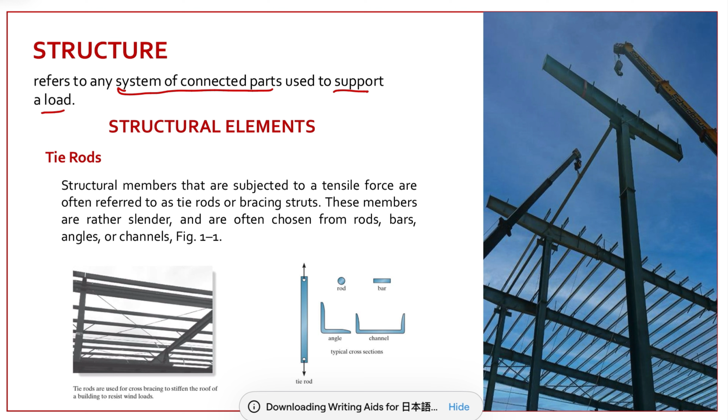We have different structural elements. First, we have the tie rods. Tie rods are subjected to a tensile force, and this is used to brace our roof or roof beams. So these are the tie rods.

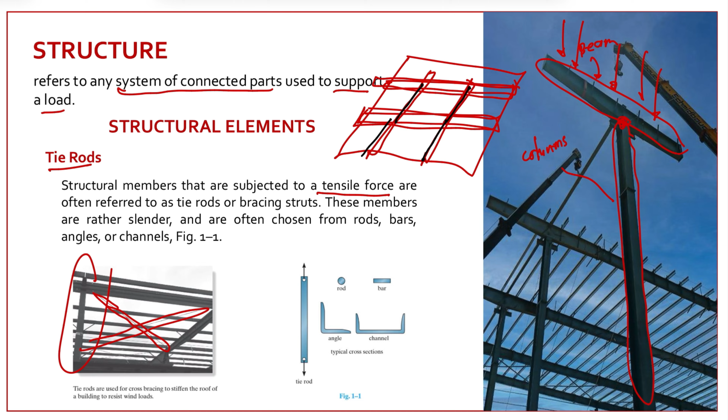Okay, so of course we have a beam. This is the straight horizontal member used to carry vertical loads. Usually our beam is made of concrete, so we have what's called concrete beams. But we're not limited to concrete - we also have wood, timber, and steel.

Concrete is usually used because it's easy to construct on site - we just pour the concrete. But different materials have different properties. For example, concrete has weak tensile force, meaning if we pull it on both sides, it easily fails. But when we compress our concrete, in compression, our concrete is strong.

That's why we also add reinforcement - adding reinforcement to concrete, what we call reinforced concrete, makes it stronger when it comes to tensile force in this type of load. Because steel has high tensile strength. So when the steel has high tensile strength and at the same time the concrete has strong compressive strength, it means its strength is balanced. So it can sustain both tension and compression - that's why we call them reinforcing rods.

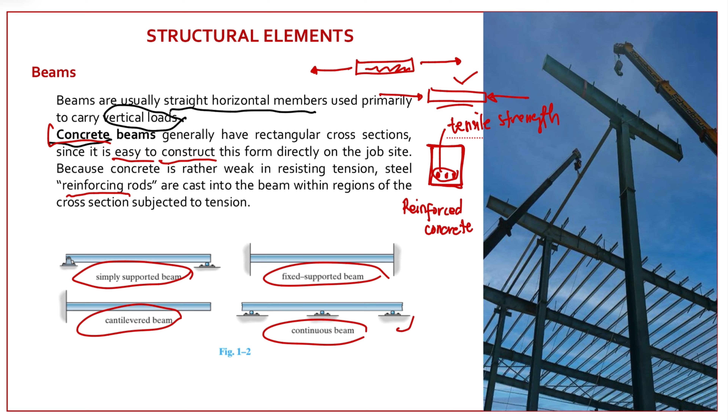So that's our beam. We have different types of beams: simply supported, fixed support, cantilever, and continuous. Usually we only analyze simply supported and cantilever beams. The continuous beam will come up around finals.

Aside from beams, we also have the columns. If beams are horizontal, our vertical members are columns. This resists axial compressive loads. When we say axial, it's perpendicular to the cross-section. We have different cross-sections for our columns.

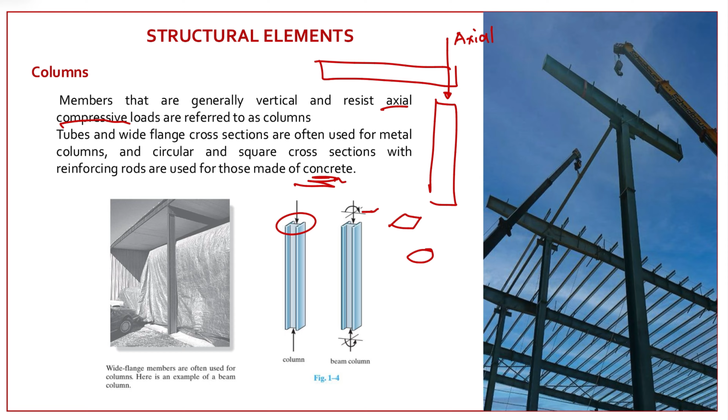Aside from those, we also have the trusses. A truss is a combination of vertical, horizontal, and diagonal elements. This consists of slender elements usually arranged as a series of triangular elements.

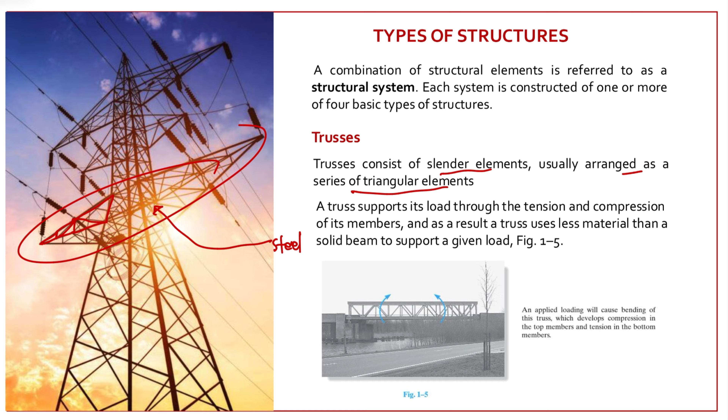We also have the cables and arches. These are also part of the structures. Cables usually carry loads in tension, commonly seen in bridges and building roofs. Arches achieve their strength in compression, usually seen in bridge structures.

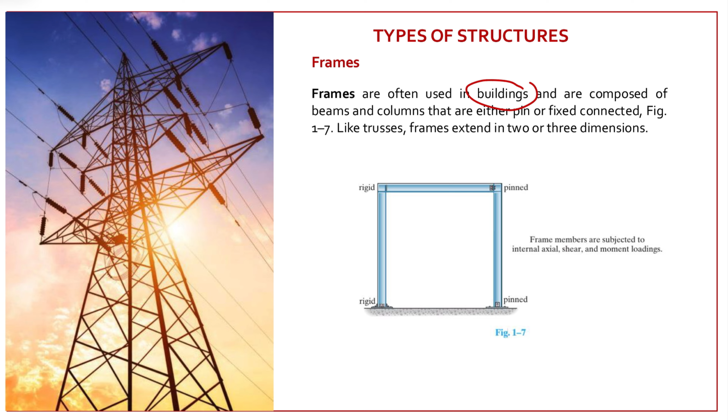We have two types of force in our discussion. We have the external force, which is the applied force and the reaction forces. We also have the internal force, which is the force and couples exerted on a member or portion of the structure by the rest of the structure.

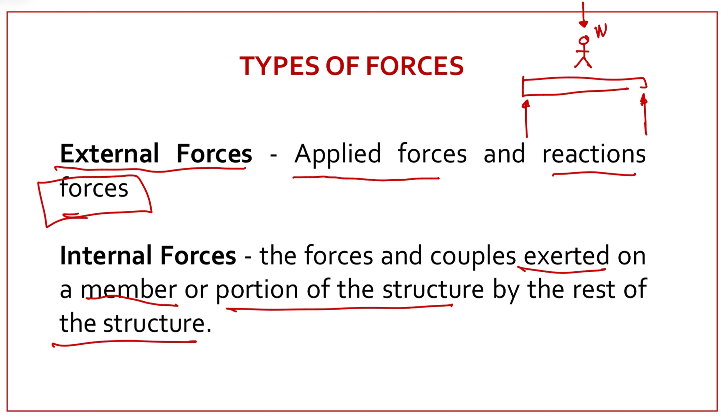Now for internal force: the forces and couples exerted on a member or portion of the structure by the rest of the structure. We don't totally see it in our figure because it's internal force, so it's inside the structure itself. That's the effect of our structure.

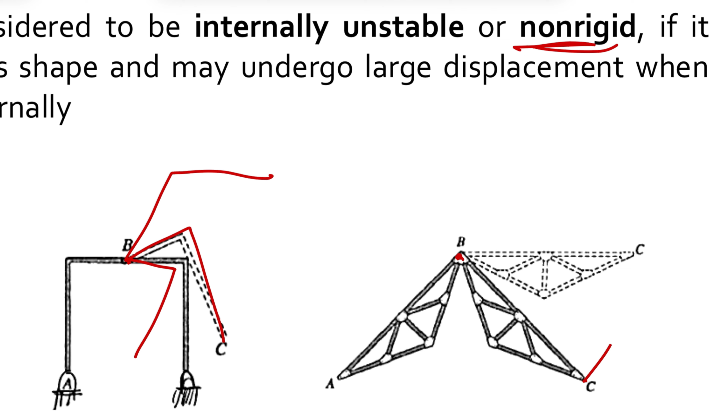So, let's proceed with the determinacy of internally stable structures.

Determinacy of internally stable means it's rigid and stable. When statically determinate, the unknown forces can be computed using equilibrium equations. We have 3 equilibrium equations: summation of moments, summation of forces X, and summation of forces Y. If our unknown forces can be solved using these, it means our structure is determinate. If it cannot be solved, our structure is indeterminate.

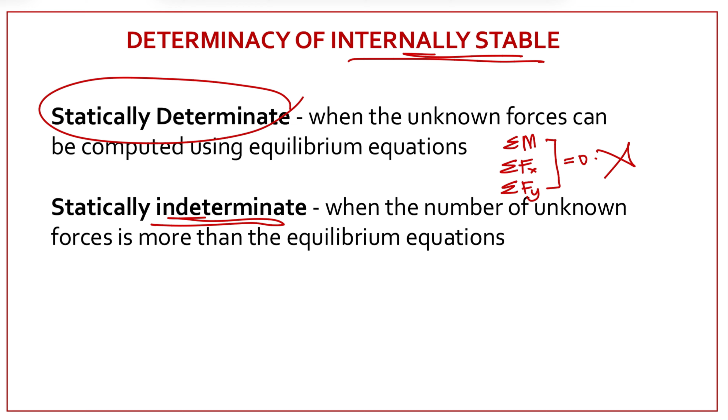So, how do we know if our structure is indeterminate or determinate?

So, ito na yung gagamitin natin. Pero we have a...

Guidelines para ma-solve yung ating determinacy ng internally stable. Okay, kapag yung ating member, kapag na-solve natin yung reactions o nakuha natin yung number of reactions ng ating structure, and then kapag equivalent to 3 po siya, determinate externally po yung ating structure. Kapag naman po less than, unstable externally. Pero kapag naman greater than, indeterminate externally.

Okay, so mamaya magbibigay tayo ng example kasi mas madali ito kapag merong example. So, ito yung determinacy ng internally stable structures for a single rigid body with no internal conditions or hinges.

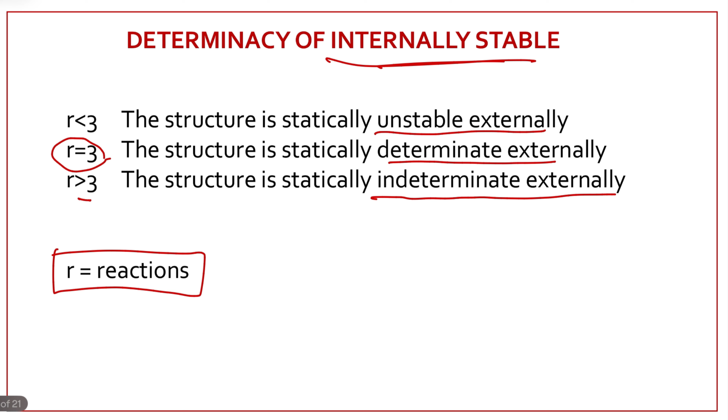I-compare lang natin yung reactions natin kagaya ng ganito. Dito sa 3, which is ito, parehas lang din. So, kapag indeterminate yung ating structure, kukunin natin yung degree. So, yung minus lang po natin yung R minus 3.

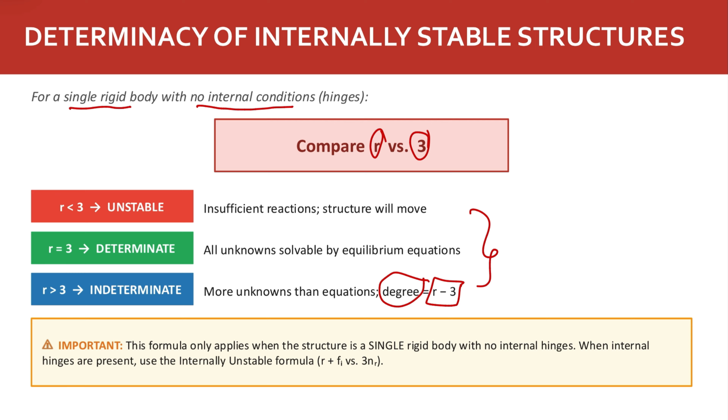Yan, paras lang. So, kapag naman na internally unstable, so kanina kasi internally stable po siya. Kapag naman unstable, meron po tayong susunod na panibagong guidelines.

So, yung guidelines natin is yung R, reaction, plus Fi, internal forces. Tapos, i-compare natin siya dito sa number of rigid bodies or members multiplied by 3. So, kapag equivalent siya, determinate. Kapag less than, unstable. Kapag greater than, indeterminate.

Yan, so let's proceed. So, ito naman yung ating formula. Kasi medyo malito kayo. I-compare lang po natin yung reaction plus internal forces dito sa 3NR or yung number of rigid members.

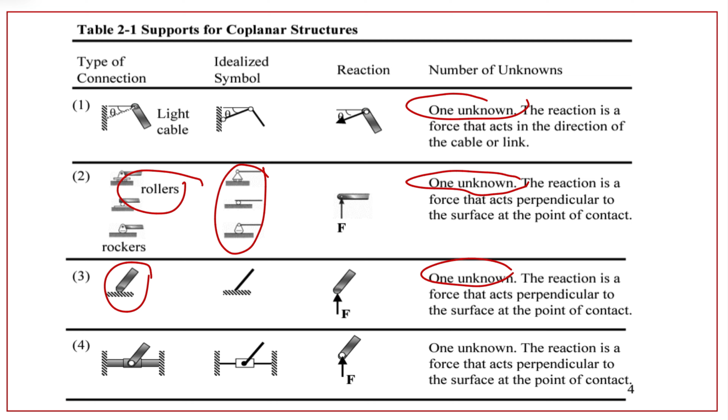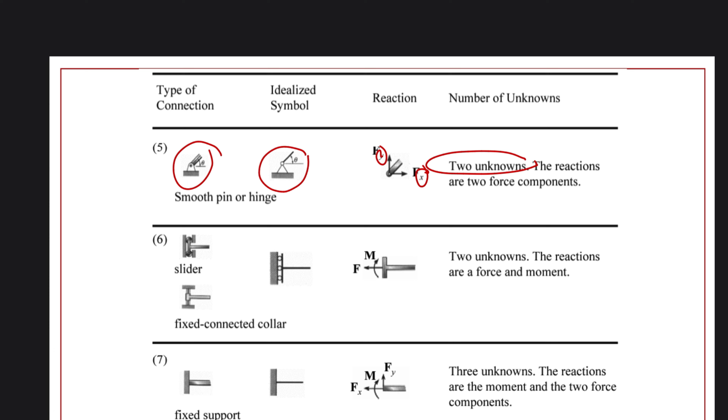Kapag naman po nakapatong lang siya, gaya nito, isa lang din po yan. So, yung ginagamit natin usually is yung smooth pin, kaya naman hinge. Yung tawag, meron po yung dalawang unknowns, sa horizontal tsaka vertical. So, kapag slider, ganito, yung itsura.

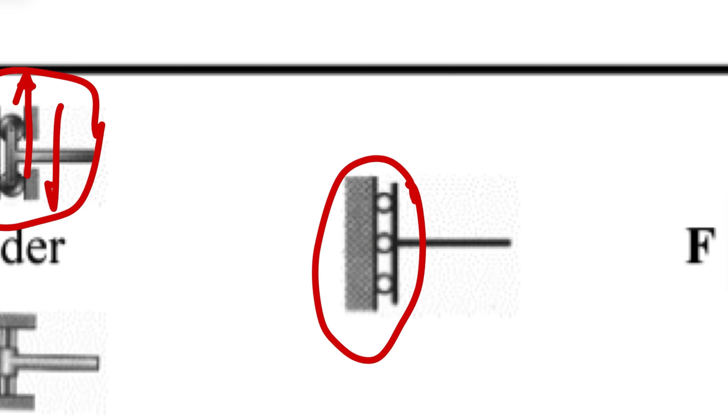Kaya naman ganito. Ibig sabihin ng slider, nag-slide po yan, no? Top, pababa. Kaya nga slider. So, meron po yung moment tsaka force.

Kapag fixed support, meron po tayong tatlo. No? Fixed support. Naka-fix po yung ating dalawang members. Meron 3 unknowns: moment, tsaka dalawang force.

So, kapag naman trusses, sa determinacy ng trusses, compare lang natin yung M, tapos R, wherein yung M is the number of truss members. Yung R naman is yung reaction. I-compare natin sa 2J. Yung J is the number of joints.

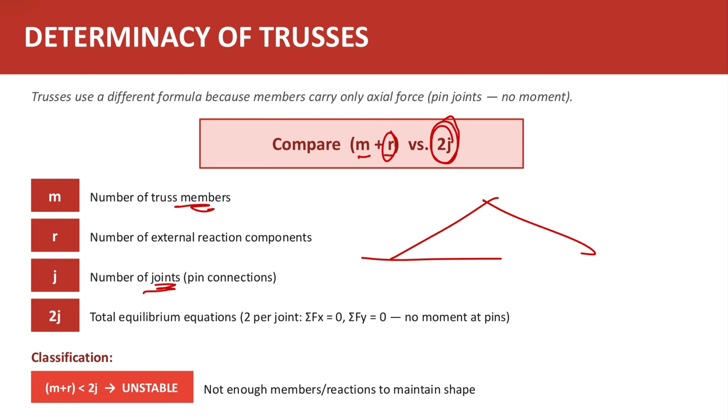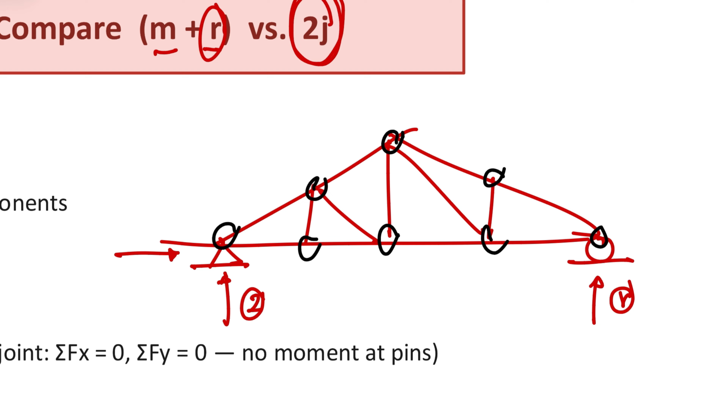So, kunyari, meron tayong truss ganito. Tapos, ganito yung ating support. Ito, 1. Ito naman, 2. So, 2 plus 1. Yung joint natin, kasi 2J. Yung joint 1, 2, 3, 4, 5, 6, 7, 8. So, meron tayong J is equivalent to 8.

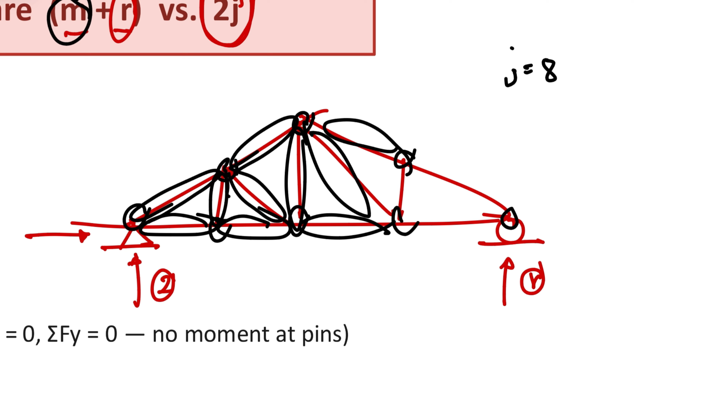Yung M naman po is the number of truss members. So, bibilangin natin yung members ng truss. Ito po yan, 1, 2, 3, 4, 5, 6, 7, 8, 9, 10, 11, 12, 13. Tapos yung reactions natin is meron tayong 1 plus 2, 3.

So dito, paglagay is, i-add lang po natin. 13 plus 3, we have 16. Equivalent ba siya? Ito yung M plus R. Yung 2J naman is 2 times 8, which is 16 din. This one is equivalent. Kapag equivalent...

Parehas lang po yung tawag dyan, yung guidelines natin, yung rules. Kapag equivalent, determinate. Determinate.

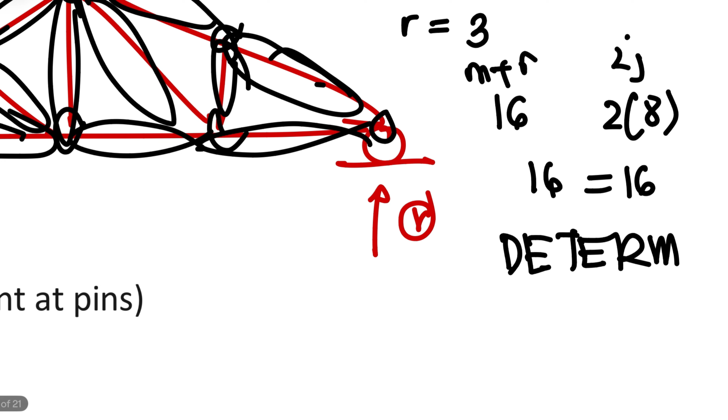Okay? So, let's try to solve for examples. Yan. We have a sample problem, 4 lang na items. So, for these 4 items, number 1, ito po.

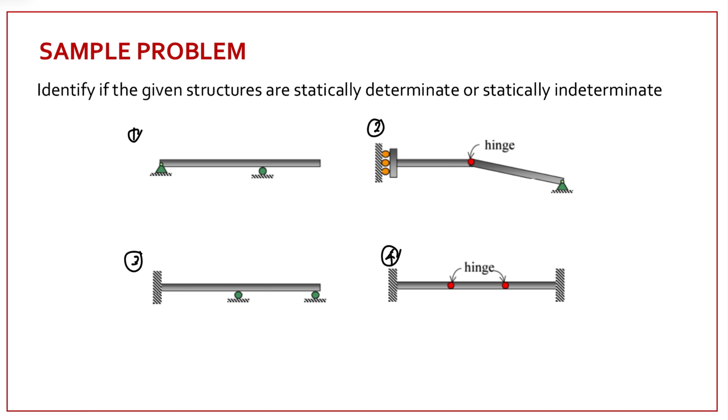Okay, so we have the formula para sa number 1. So, number 1, kung observe nyo, isang member lang po siya. So, kunyari, tanggalin natin yung ito. Automatic, hindi po mababago yung shape nito. Tama. So, ibig sabihin, this one is internally stable.

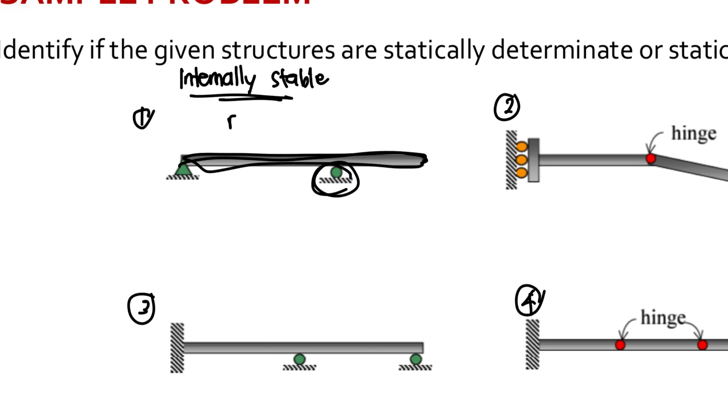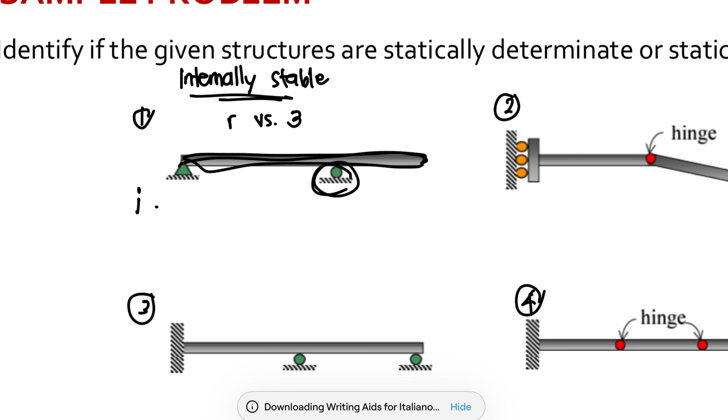Pag po internally stable, yung ating equation is, i-compare lang po natin yung R dito sa number 3 o sa 3. O kaya naman, kung gagawin natin siya ng equation, gawin natin yung I. Sabihin natin I is equivalent to R minus 3.

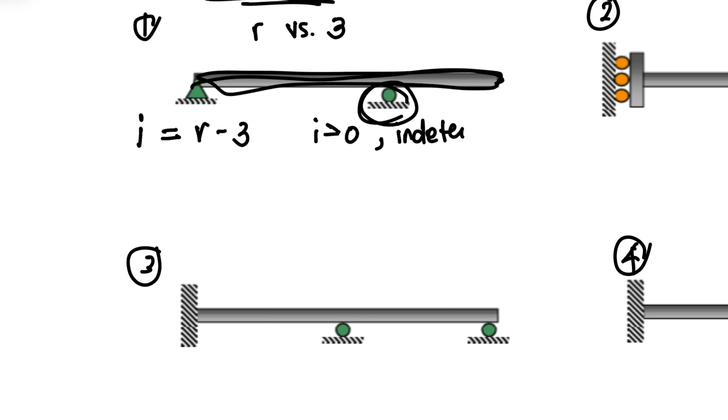So, kapag yung I is may value, ibig sabihin positive value kasi may sobra yung reaction. Ibig sabihin, kapag yung I is greater than 0, indeterminate. Kapag naman yung I is equivalent to 0, determinate.

Parang ganun lang. Binago ko lang yung equation. Pero parehas lang po yung approach. Ito unstable.

Pero pwede nyo gawin is kukunin nyo lang yung reactions. So para makuha yung reactions natin, bibilangin tayo based dito sa supports. So this one is pin. Sa pag-pin, meron po yung dalawa: horizontal, reaction X, tsaka reaction Y.

Dito naman, meron lang yung isa, which is reaction Y. So, meron tayong 1, 2, and 3. So, yung R po natin is equivalent to 3. So, again, i-compare natin yung value ng R sa 3.

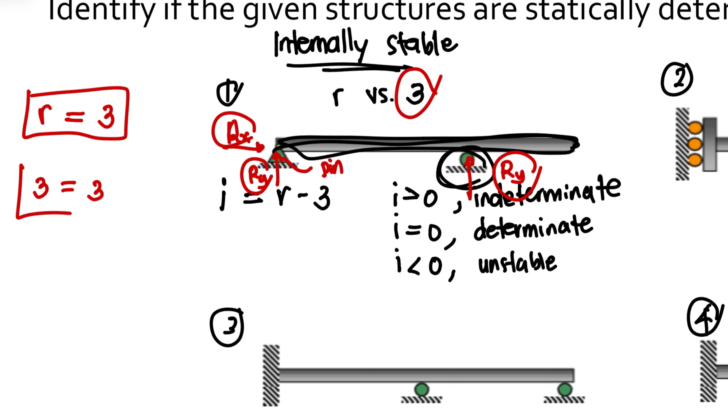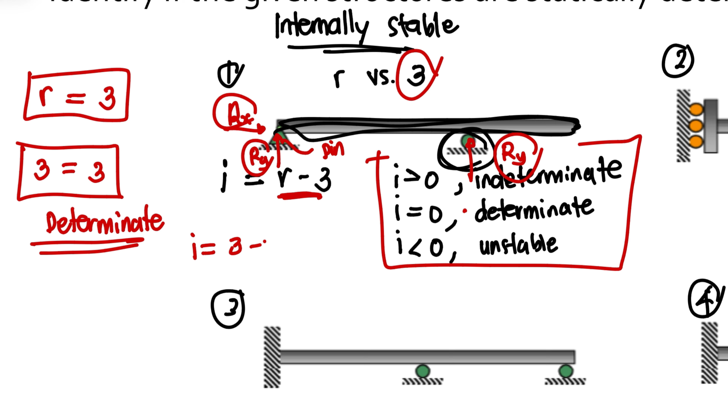So, yung R is equivalent to 3. And then, this one is also 3. Kapag equivalent po siya, this one is determinate. Tama? Or kung gagamitin natin ito, yung I natin is equivalent to 3 minus 3. This one is equivalent to 0. Kapag equivalent to 0, determinate. Okay?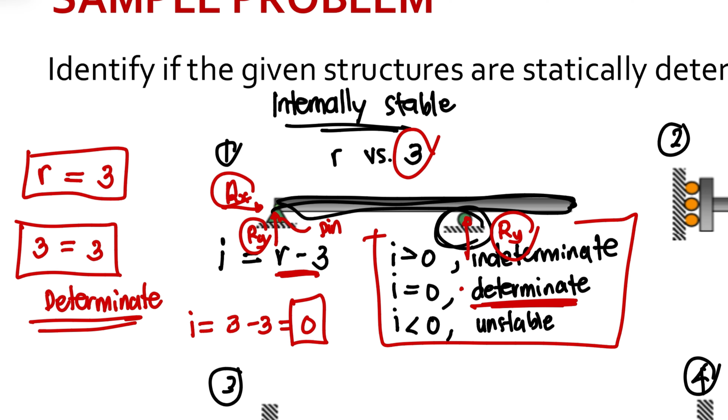Naintindihan po. So, we have the next one is yung ating ito. Yung may roller.

So sa roller, we have, syempre, determine muna natin yung ating reactions. Determine muna natin kung stable ba siya or unstable. So meron tayong hinge. Kapag tinanggal natin yung ating support, itong hinge pwede siya mag-move freely. Kailangan pag ganito, ibig sabihin mababago po yung shape niya kapag tinanggal natin yung support. So this one is internally unstable.

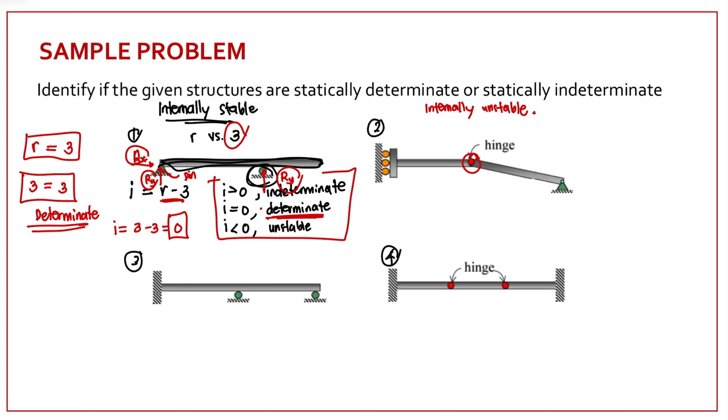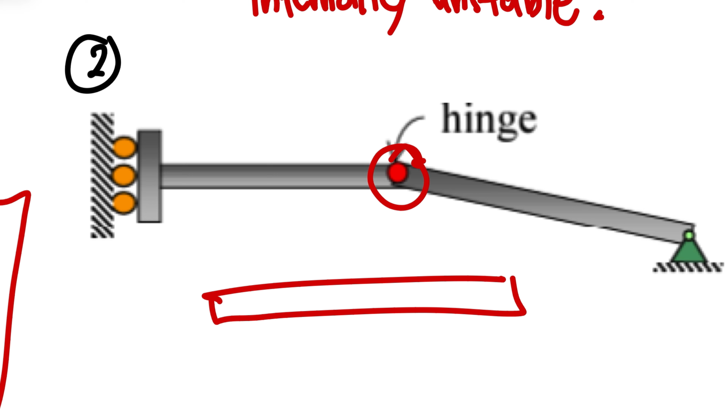Or one way para malaman natin kung internally unstable or stable ba siya is kapag wala po tayong, kunyari, isang members lang, diretsohan, tapos wala tayong mga internal hinge, kaya internal forces. So usually dito, gagamitin lang natin is equivalent to 3, or R versus 3.

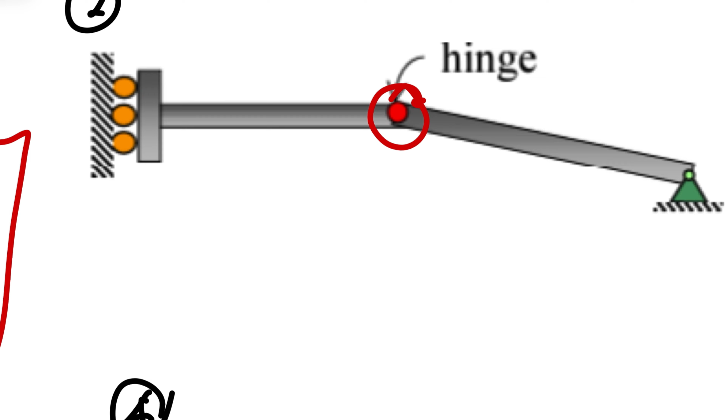So in this case, meron tayong hinge, so magiging siyang internally unstable. Kung babalikan natin yung discussion natin, so internally unstable, ito po yung magiging equation natin. So sa part ng internally unstable, meron po tayong equation na R plus internal force equivalent to 3 times NR, or the number of rigid members.

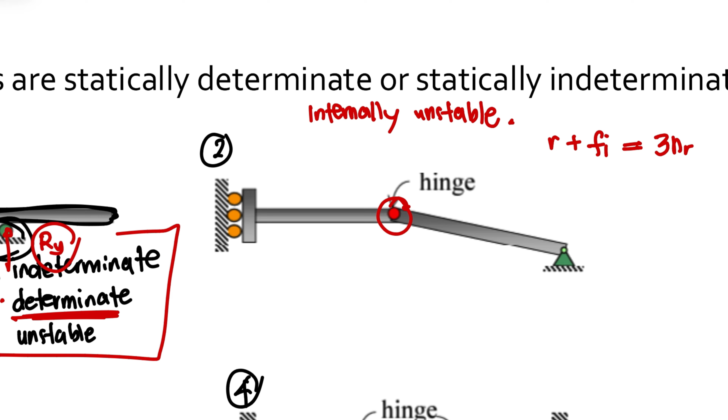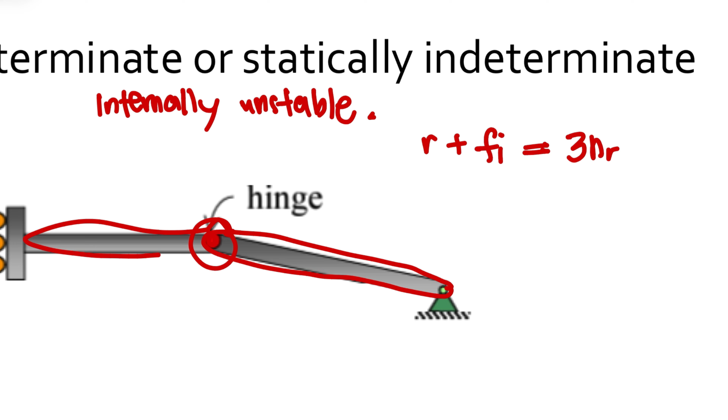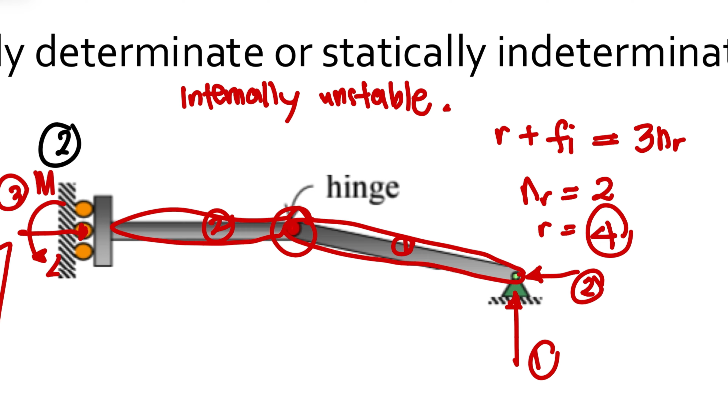Sa part ng number of rigid members, yung bibilangin po natin is yung mismong members. So kunyari mayroon tayong hinge, yung members po natin, magkakahiwalay yan sa dalawa kasi magkahiwalay po yan na members. So this is NR, this one po is 2, kasi 1 and 2. Okay, so for the reactions, meron tayong pin, 1, 2, and then sa roller naman meron tayong ganyan tsaka moment. So kung bibilangin natin yung reaction, meron po tayong 4: 1, 2, 3, 4.

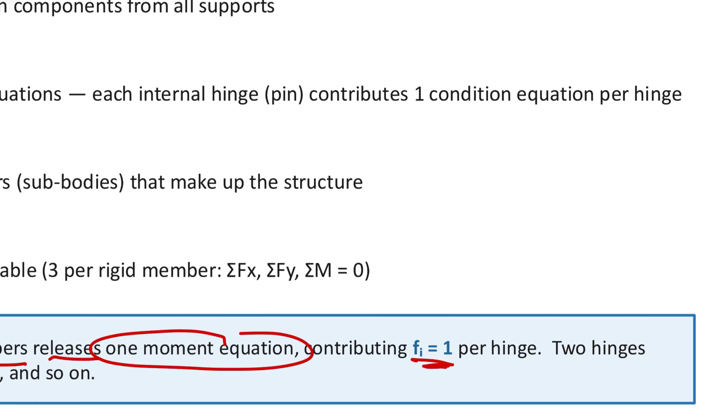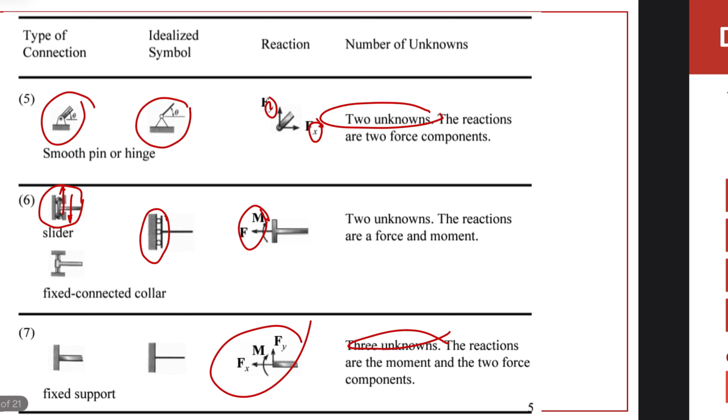Okay, so for I, meron po tayong only one hinge, so this one will be 1, kasi nakalagay dito sa ating discussion kanina: an internal hinge between two members releases one moment equation, contributing 1 per hinge. So kung dalawa naman po yung hinge natin between the same two members, it will give you 2, and so on. Kaya dito, you only have 1. So kung ilalagay natin yung equation natin, R is 4, plus 1, and then yung 3 times number of rigid members, yung number of rigid members is 2. This one magiging 5, and this one is 6. So yung 5 po is less than 6, kaya po ito po is unstable.

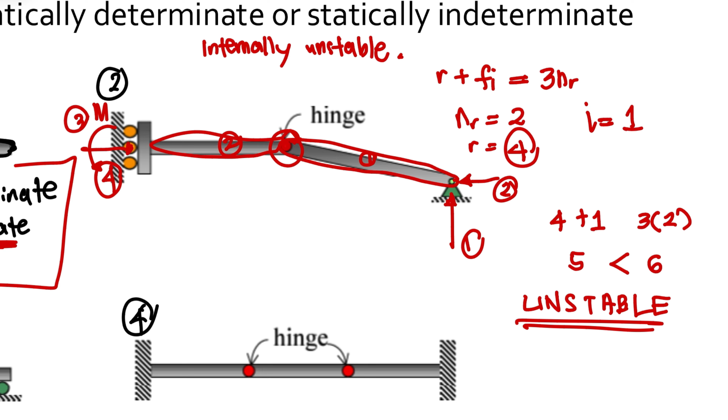Okay, so for number 3, again, this one is internally stable. Single rigid body lang po ito. Kung tanggalin man natin to, hindi mababago yung shape. Internally stable.

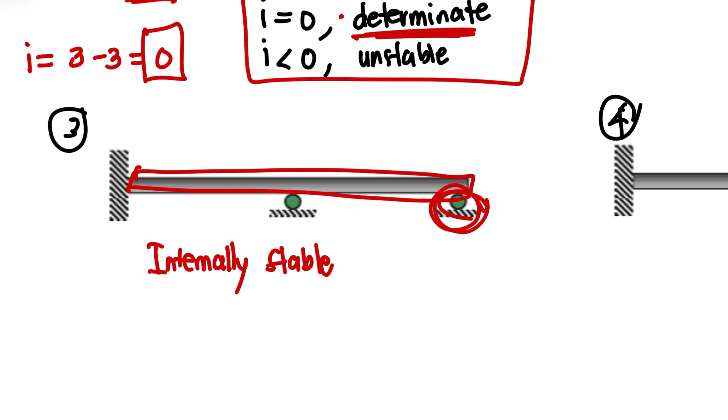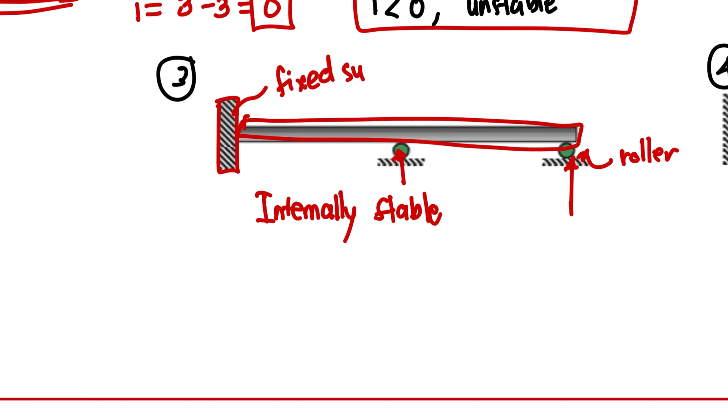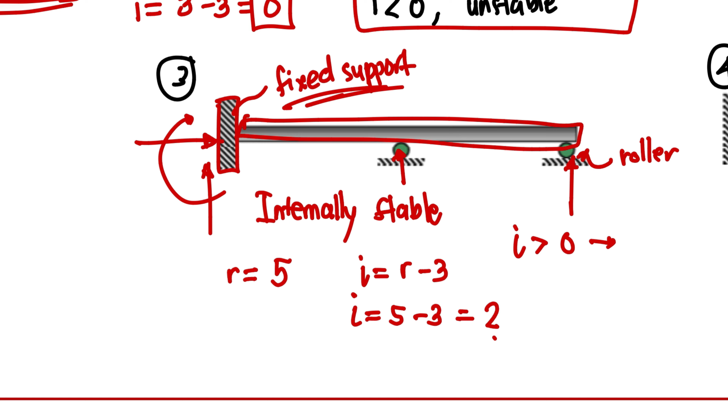I is equivalent to R minus 3, so we have 5 minus 3, this one is 2. So kapag po ganito, ibig sabihin na is yung I natin is greater than 0. So kapag greater than 0 na siya, o kaya naman, hindi siya equivalent to 0, this one is statically indeterminate.

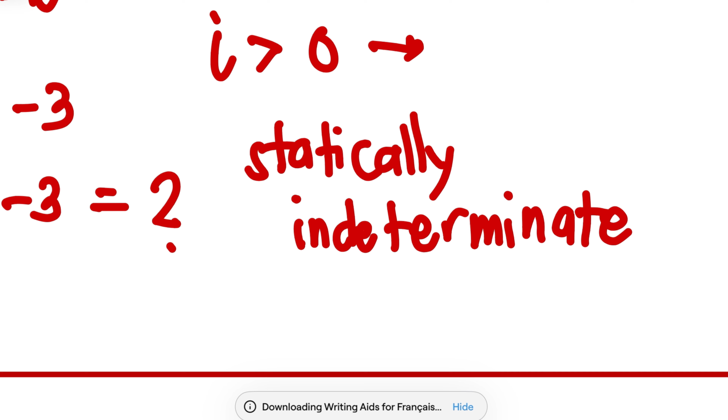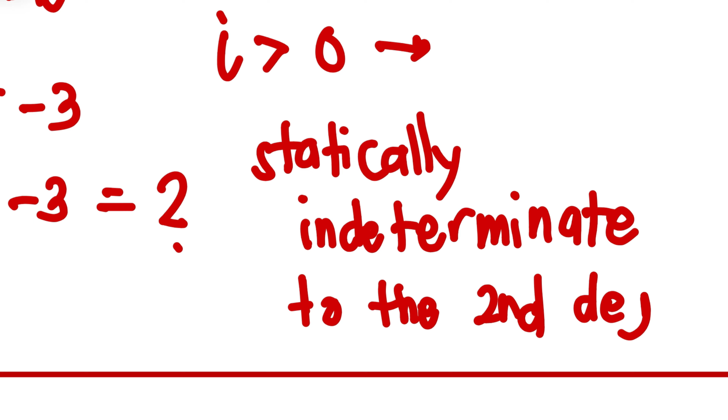Tapos kapag sabi natin indeterminate, meron po tayong degree of indeterminacy, so kaya ilalagay po natin, statically indeterminate to the second degree.

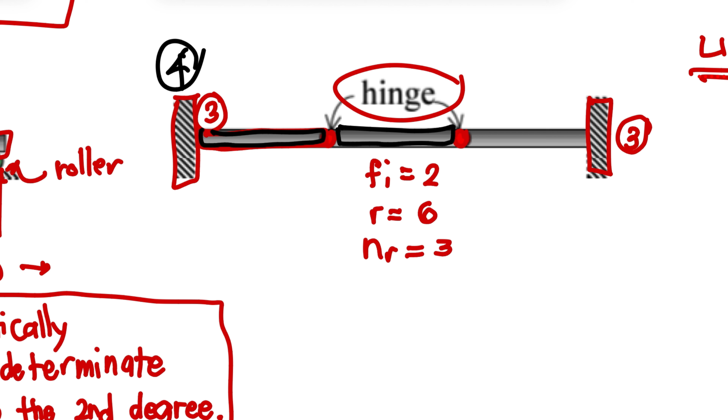Okay, so for number 4, meron tayong dalawang hinge dito. So for these two hinge, meron tayong siyempre internal hinge or internal force. We have 2 kasi we have 2 hinge. So part naman po ng reactions, so this one is fixed support, same po yan dito sa kabila. So kapag fixed, meron po tayong tag-tatlo, so tag-tatlo, syempre we have 6 members or reactions, I mean. So kapag naman rigid members, since we have internal hinge, mahati yung members natin into 3. So kaya po dito, we have 3 rigid members.

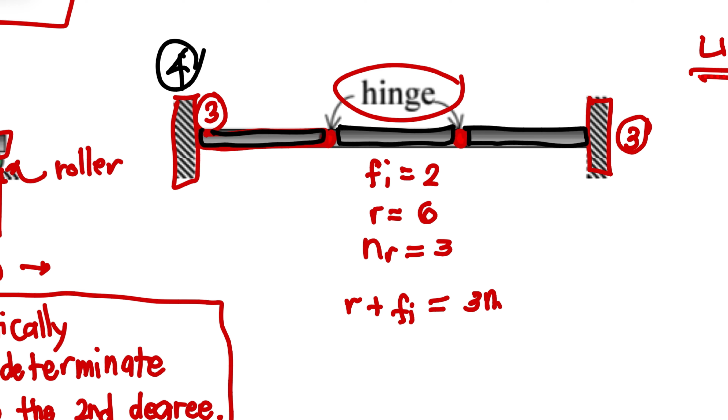So kung ilalagay natin yung equation, we have R plus internal force is equivalent to 3 times number of rigid members. So using this formula, we have 6 plus yung number of internal force natin is 2 since we have 2 hinge. This one is 3 times the NR natin, which is 3.

Bakit hindi siya nagko-close? Kaya ito magiging 9. Ito naman 6 plus 2, 8 lang. So kaya dito, yung ating last item is less than. Yung 8 is less than 9.

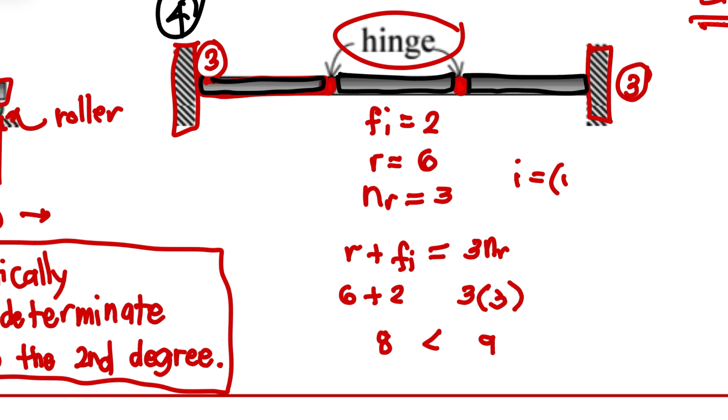Kaya naman kung gamitin natin yung I, pwede naman kasing ganito: R plus Fi. Kanya-kanyang trip na lang po. Pero you can use other methods aside from this.

Kagaya nito, I minus 3NR. So yung R plus Fi is magiging 8. Bawasan natin ng 3 times 3, so 9. Ito yung magiging sagot. Less than, this one is negative 1.

So kapag yung I is less than 0, this is unstable. Ito magkaiba, ano yan, pero parehas lang din naman. Ito na po yung ating sample problem.

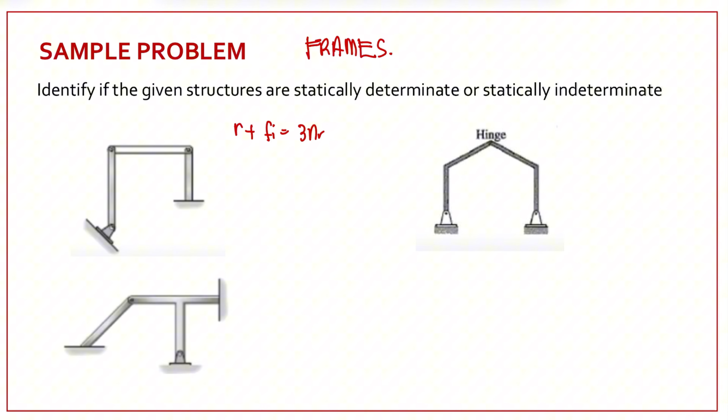Okay next, so we are going to solve for the frames. For number 1, syempre gagamitin natin yung same formula, R plus Fi is equivalent to 3NR.

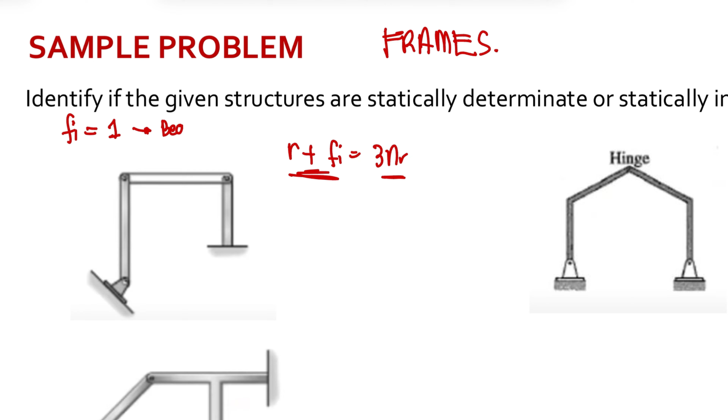Same formula lang, pero pagdating po natin sa frames, magbabago po yung ating internal force. For beams, as we all know, we have one internal force. Pero pagdating po natin sa frames, yung ating internal force natin will become 2 pagdating po sa internal hinge natin. So bali, per internal hinge natin sa frames, meron yung equivalent na 2.

Wherein kapag beams po, meron po tayong equivalent na 1. Dahil po yan sa kapag pinaghiwalay po natin yung dalawang frame, yung dalawang members, magkakaroon po ng dalawang unknowns o two unknown forces internally. Kaya i-count natin siya as 2 since we have the frames po.

So pagdating naman po sa reaction, same lang. This is fixed support. And then pagdating naman sa kabila, we have the pin support. We only have 2 reactions. So kaya yung number of reactions natin dito is equivalent to 5.

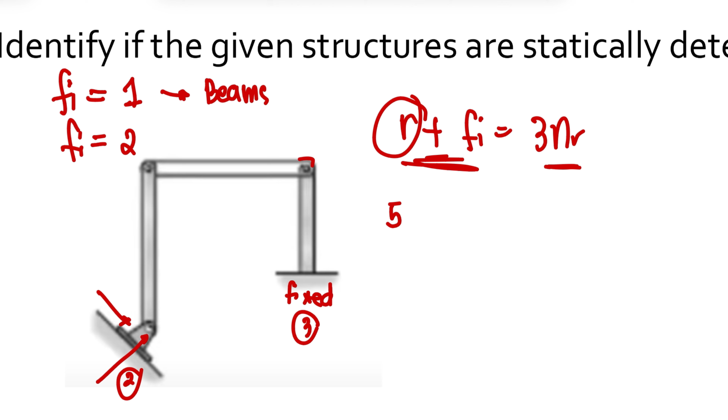Pagdating naman po sa internal force, meron tayong dalawang hinge. So this is equivalent to 4 since 2 times 2. And then for the number of rigid members, since we have the hinge, bilang po tayo ng members like 1, 2, and then 3. Ganyan lang po yung pagbilang natin.

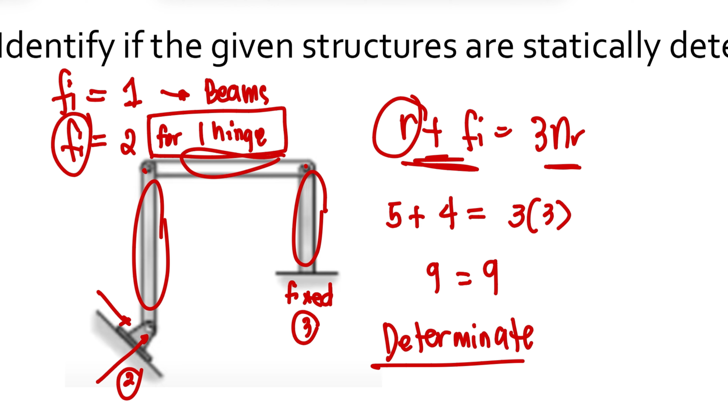So we have 9, and then 9 naman po sa kabila. This one is equivalent. So kaya determinate yung ating item number 1.

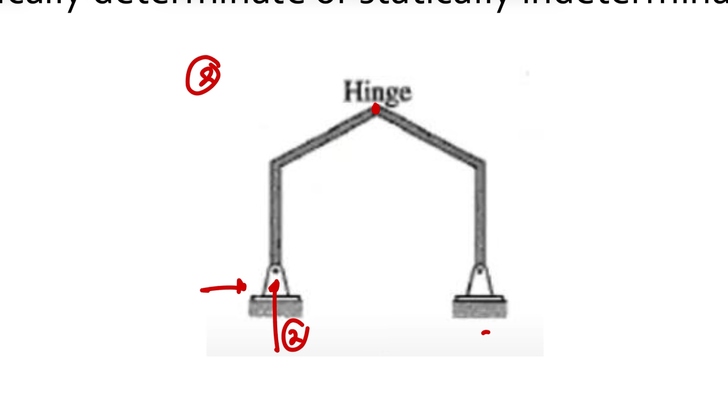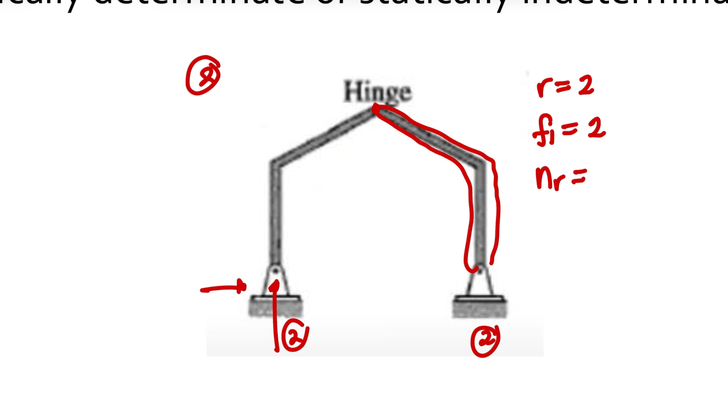Pagdating naman po sa item number 2, ito po yung next problem. We have internal hinge dito sa may top portion ng ating frames. And for the reactions, meron lang po tayong parehas na reaction in both support, so we have 2 reactions, at 2 naman po sa internal force since we have the 1 hinge. And then for the number of rigid members, we will count this as 1, yung nasa right side, isa lang po yung magbilang natin dito kasi meron po tayong internal hinge.

Kung wala naman po tayong internal hinge sa isang connections, wala po tayong bibilangin na another members. Kaya mangyayari, we have 2 plus 2, at sa kabila we have 3 times 2. So this is equivalent to 4 and then 6. So 4 is less than 6, kaya meron po tayong unstable structure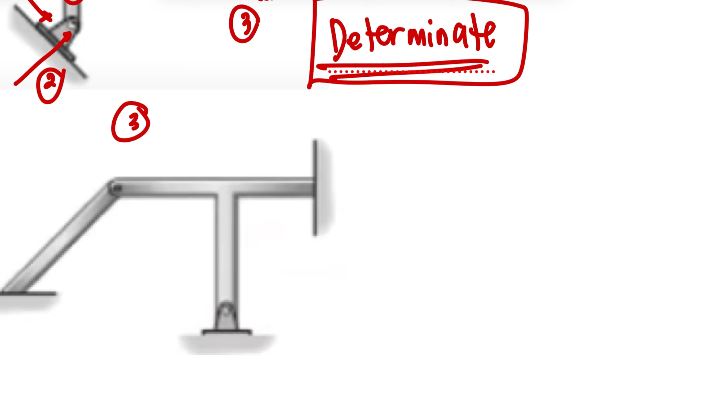for number 2. Now we will proceed for number 3. So for number 3 problem, meron tayong tatlong support. For the first support, we have the fixed support, so this has 3 unknown reactions.

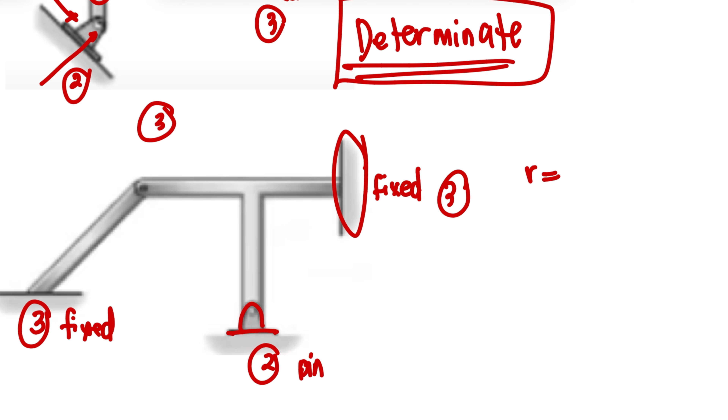And for the next one, we have the pin, so 2. At the same time, sa last, we have 3 reactions, kaya fixed po siya. So for the total reactions, we have 3 plus 3 plus 2, so this is equivalent to 8 reactions.

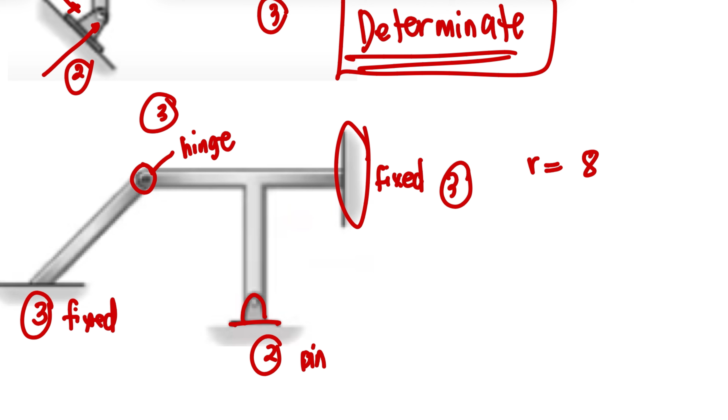And for the internal force, we only have 1 internal hinge, kaya ang bilang po natin dito is Fi is equivalent to 2. And then for the last one, we have the number of rigid members. Counting for the number of rigid members, we will count the members that has no internal connections, kaya yung ating members is equivalent to 2 lang.

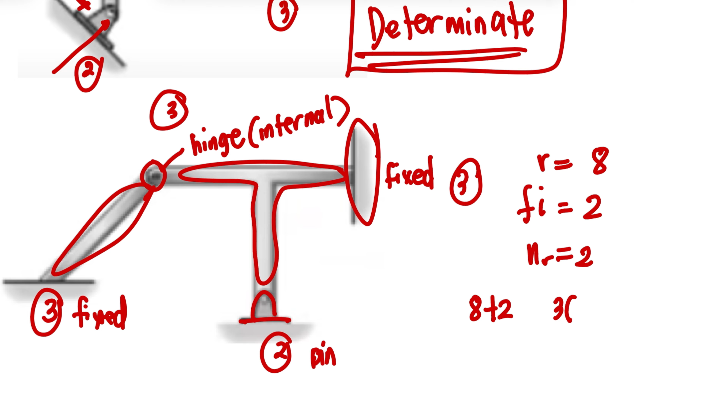So adding the R plus Fi, we have 10. And then for the other side, we have 3 times 2, so this is equivalent to 6. So this one is greater than, 10 is greater than 6, so this one is indeterminate.

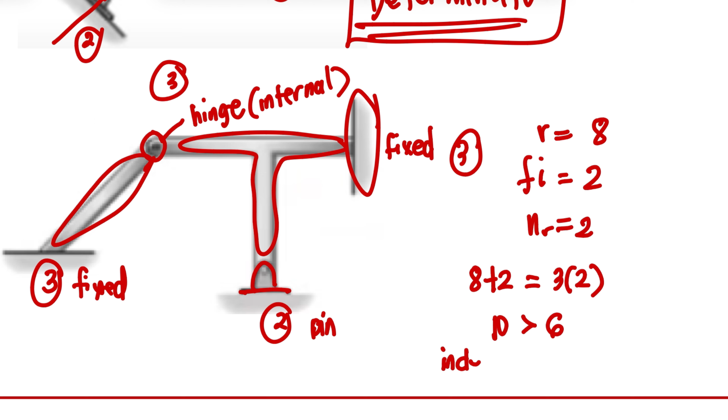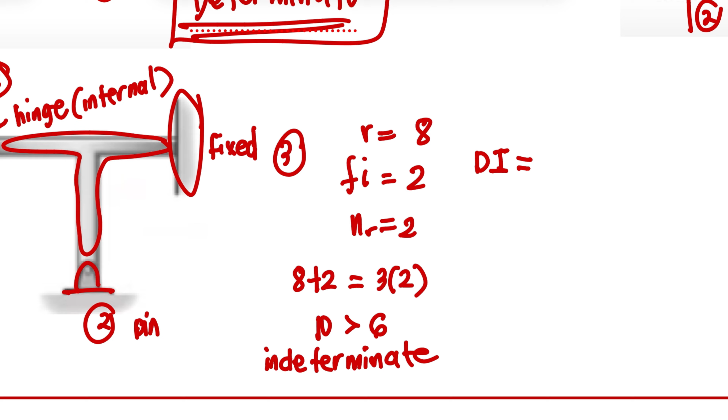So kapag sinabi natin indeterminate, we will solve for the degree of indeterminacy. Pagdating ng degree of indeterminacy, we can just subtract the left side to the right side. We have R plus Fi minus 3 times N sub R. Kaya dito we have 8 plus 2, we have 10, minus 6. So kaya mangyayari, we have degree of indeterminacy to 4, or indeterminate to the 4th degree.

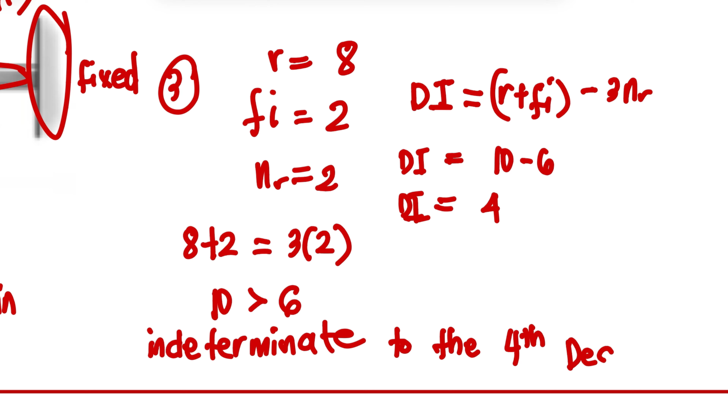So yan lang po yung ating example or sample problem pagdating sa frames and structure na beams.